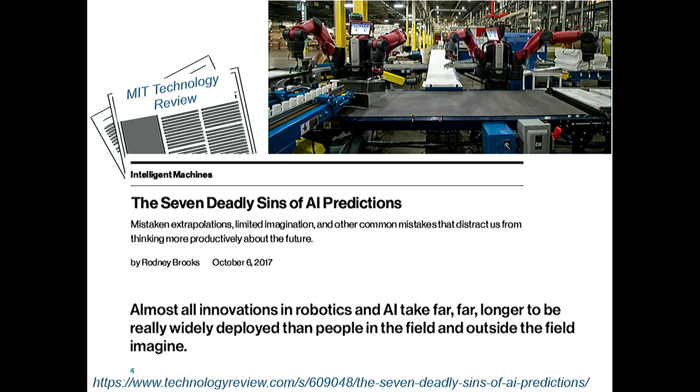The warning I want to give you comes from Rodney Brooks. Admittedly he's Australian, which perhaps we hold against him, but he's good. He's a robotics researcher who spent all his time in the US. He founded Rethink Robotics and created the Baxter robot, which has been used for a lot of modernisation. It's not a fancy robot, it's relatively inexpensive, and does a lot of stuff in factories, as you can see in the video.

He warned us that all these predictions about innovations in AI and robotics will take a lot longer than you think. So if you follow that kind of thinking, you'll know what he's talking about. But just to warn people, it's not going to happen immediately.

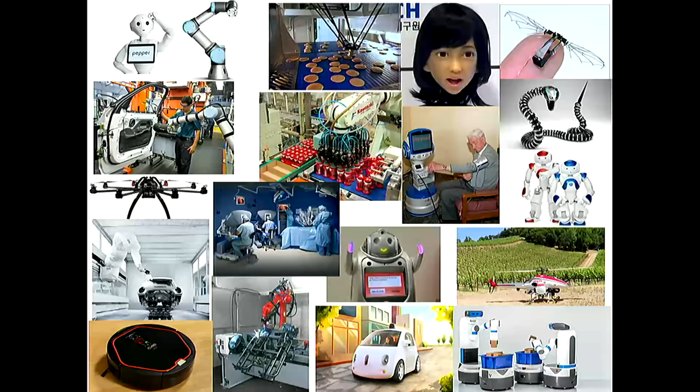But I do have to talk to you about what is a robot. Everybody kind of asks this question. There are some examples of robots up there, and it's difficult to define precisely what a robot is. I wouldn't recommend you split hairs on it unless you've had a few beers and want a good late-night conversation at a party. Because, is a crane that's putting up a building a robot? Well, normally we'd think not, right? Why is that? Well, actually, we think robots have to be doing a bit more than that.

But there are all kinds of robots. You can see welding robots, paint spraying robots, palletizing robots. Those industrial robots are characterized by having lots of joints, arms, sometimes 7 joints, multi-axis, and they're programmable, so they're multitasking—you can program them to do different things. That's one kind of robot. They've been around in industry since about 1960.

Then the other kind of robot are service robots, which are generally mobile. There are robot vacuum cleaners, autonomous self-driving cars, logistics robots in Amazon's warehouses, helicopters and drones that are autonomous. They're all robots because they're programmable, multitasking, can do lots of things, and because they're autonomous—they're making their own decisions. Well, we program them to do that, but they're making their own decisions.

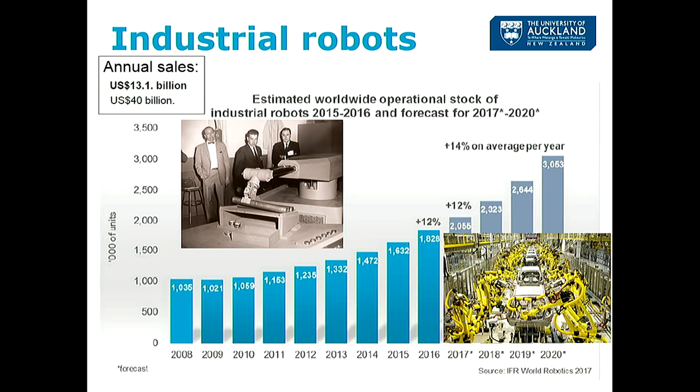Nowadays there are about 2 million industrial robots installed in the world—that's a rough estimate. The International Federation of Robotics does a report every year summarising this stuff, and the number of robots is growing about 14% a year. So the number is increasing around the world, but not crazily—it's been gradual since about that time, maybe a bit faster now than it used to be.

That's about 300,000 more robots a year in factories. The highest uses are in automotive, making cars, and in electronics, assembling components. Annual sales are about 13 billion in robots, and if you include all the software and parts that go with them, it's about a $40 billion business around the world. So it's big, but not massive.

If you look at the service robot industry, we usually think about two kinds: professional service robots and personal or domestic ones. They're quite different businesses really—the technology isn't so different, but the business is.

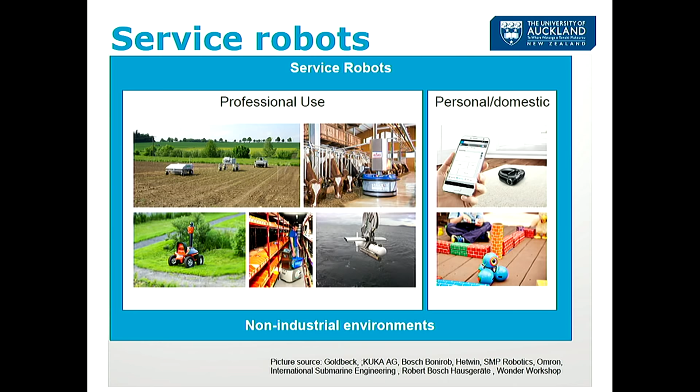Professional ones are used on farms—this shows a robot in a milking environment, and there are different kinds of milking robots. There are quite a few in New Zealand; not a large percentage of farms have them, but there are quite a few. There are also drones, robots cutting your lawn, and logistics robots moving things around factories. Then there are personal robots—the robot vacuum cleaner, the Roomba, and a dozen or twenty other kinds of robot vacuum cleaners around the world, plus entertainment robots, kids' toys, and all that kind of stuff.

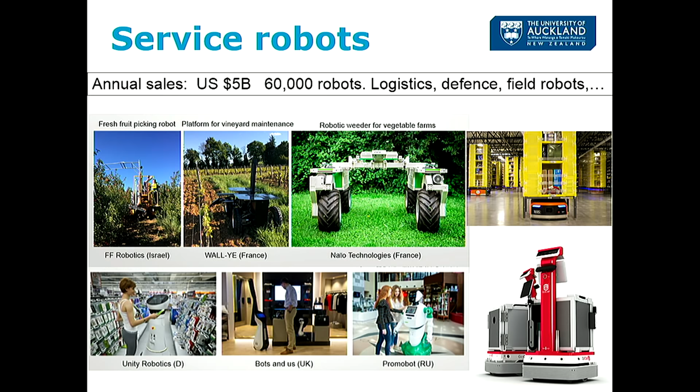For professional service robots, that's about a $5 billion business, about 60,000 robots a year—logistics, defence, field robots on farms, and so on. The largest use is in logistics, think Amazon's warehouse where robots pick stuff up and put it in the post to send to you when you order things. For personal service robots, there's a lot more—maybe 7 million sold a year, worth about $2.6 billion, much of it household vacuum cleaners, with millions sold each year.

So that's the rough picture of what's going on in the world. In terms of research topics, I've taken a bunch of topics from the biggest robot conference in the world, which is in Brisbane in two weeks. These are the kinds of things people study when doing research in robotics.

The thing to remember is that robotics research is a systems kind of research. A lot of research involves working on one component, one piece, one material, or one gadget—people doing robotics generally don't do that. A few do, but generally you're trying to build a robot system. It's hard to get your paper published unless you build the robot and do something with it and get results, because you're making a claim that your theory will enable a robot to do something. So it's a different kind of research. Other areas are similar, I guess, but most areas are more narrowly focused.

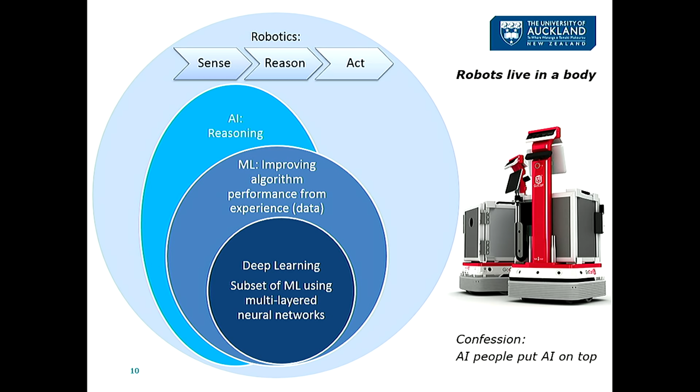So people will debate this, and AI people will come along and give you this circle diagram with AI at the top and robotics underneath it. You could argue about that for a while, but this is the way I see it: robotics is sense, reason, and act. AI is about the reasoning, and people talk very strangely about AI these days, especially in the media, as to what it is.

But for me, it's about making decisions, about reasoning and trying to be autonomous. Some people see it as seeking to emulate human intelligence. You might have seen - last night the AI Forum released their report on AI shaping the future of New Zealand, with a literature survey and a whole lot of details about what it might mean for New Zealand.

And then machine learning is part of that - learning from experience is a way to be able to make better decisions. A lot of the new advances are in the subset of machine learning which is deep learning, where you use neural nets to make decisions. Recent advances in three things - the algorithms for multi-layered neural networks, the speed of the computer hardware to execute that, and the massive amount of data available - have enabled a whole lot of things to tip over and happen usefully in business.

So you'll see - I'll show you a video later where we're using deep learning to find kiwi fruit, because it's better than handcrafting the algorithms.

So talking about research in New Zealand, I'm going to give you a kind of sampling of that, and I want to thank my colleagues from around the country who have given me a slide or two each so I can tell you what's going on, because that's what I was asked to do, and that's something we do want to do.

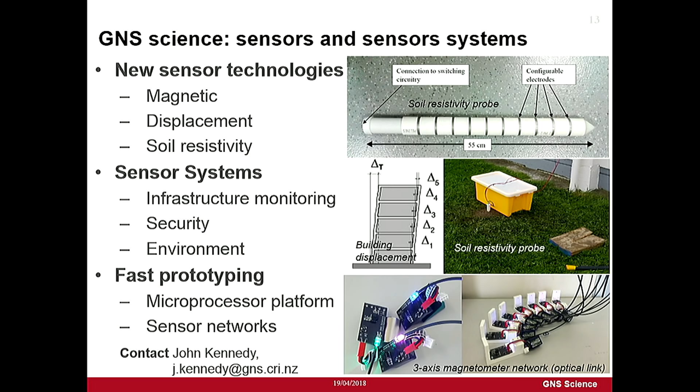And GNS—John Kennedy gave me this slide—are making new kinds of sensors, with quite a lot of expertise in magnetics and so on. So that's good.

And then also making sensors, but putting them on mobile devices and more outdoors, are the people at Lincoln Agritech, a small research organisation attached to Lincoln University. They do a lot of work on farms: crop assessment, spraying, estimating yield—all really important for the business. They use not just vision but also infrared, radar and electromagnetic sensing. They've got a lot of expertise in electromagnetics, and they're putting it on devices and vehicles, driving around farms trying to measure, model and predict the yield from grapevines.

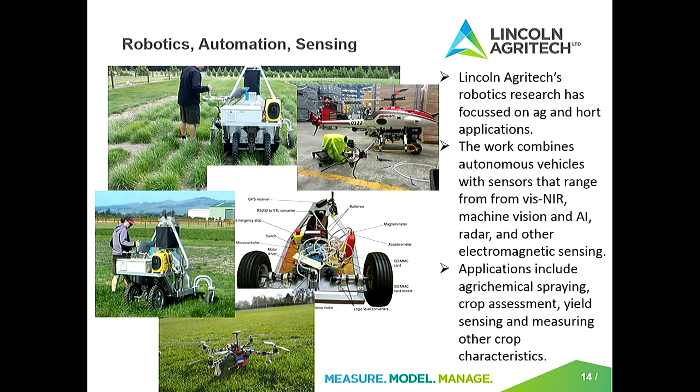At Canterbury nearby, there's a number of groups working on robotics, ranging from assistive devices to help people who need help with physical movement, to manipulating at the cellular level - robots manipulating individual cells. There's a big mission there, which is laboratory automation. The DNA sequencing only succeeded before we expected to sequence the human genome because of robotics, automating the process in the laboratory.

So that's quite a good mission, and there's more research about that. It'd be nice to send a robot through your body and clear out all the cold or flu bugs, but we haven't quite got to that yet.

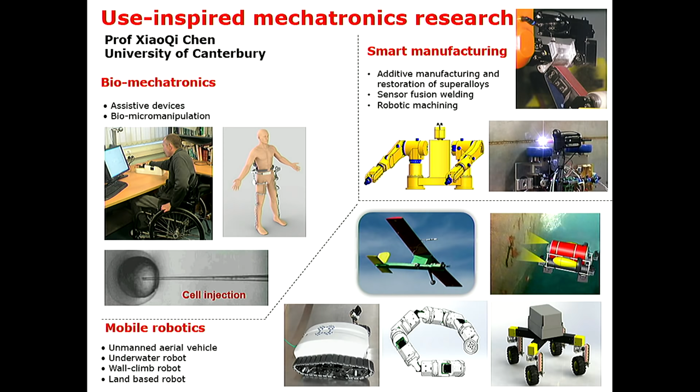And then robots in manufacturing, including robot machining, and there's a lot of work on mobile robots there, underwater robots, but also robots that are flying around in the skies. There's a geospatial unit doing mapping. And there's wall climbing robots as well.

And of course, well, Mike Shadford's going to talk about industry next time, so I won't talk about companies so much. And then at Canterbury, but with Scion, who's based in Rotorua, Richard Parker's doing this at Canterbury with some of the people there, making a tree climbing robot that climbs from tree to tree.

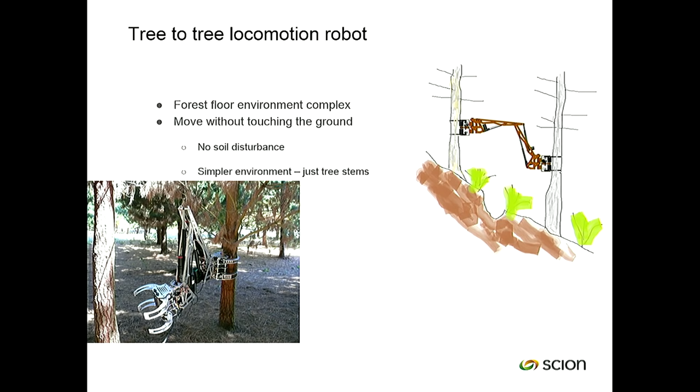You can kind of see what it's doing. And then he tells me he put a chainsaw on it and cut some branches off a tree to do some pruning. Sounds dangerous to me, but forestry is dangerous anyway, I guess. So that's a very specialised kind of robotics work, but he thinks it's better than trying to traverse the ground is to climb from tree to tree.

And Richard Green's doing quite a lot of work, and he's in computer science, doing a lot of work in computer vision, especially 3D reconstruction. So there was a project about grapevine pruning - reconstructing the grapevine structure by looking at it with cameras and then figuring out where to prune it using pruning rules. It's quite interesting. And then he's been doing some stuff about pruning trees as well, and drones.

And also some work with underwater ship hull inspection. We're working together about that, and other inspection tasks.

And then at Waikato, moving up to North Island a bit, Mike Duke's a professor of agricultural robotics there, and his team's worked on a number of agricultural robotics projects and working together with companies, for example Arborgen. So they're working on robotics to do things like helping in forestry nurseries - pulling plants out or putting them in, manipulating the plants and so on, to automate that process, all about being more productive.

And we're working together on Mike's group and ours on kiwi fruit and apples, and I'll show a video of that. Mike's also doing some things about harvesting asparagus, which is, from an automation point of view, other people have tried to do it and it's quite hard. And he's doing quite a few other projects as well.

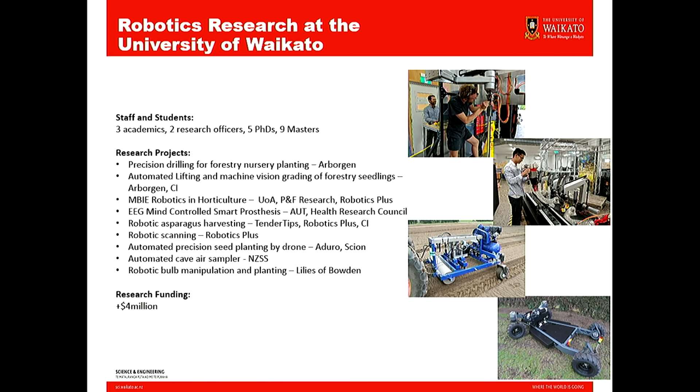I quite like that Mike builds stuff. He used to build electric cars and things, so he's always building things, which is what we're doing in the project we're working on together.

And then at Otago, there's quite a lot of focus on some of the technology for robotics. Brendan McCane gave me this slide. The people he's working with down there are kind of focusing on understanding - you can see in the video - understanding movement and what's the motivation for why you would want to move. So how you learn about the world. It's a bit of learning, how to predict what's going to happen in the future. If something's happening now and you make a movement, what will happen next?

And again, there's a lot of focus there on reconstructing 3D shapes from images. So take an image with a camera, which is a flat image, and figure out what's the 3D nature of the world you're looking at, which is something that robots need to do.

And at AUT, there's a robotics group, Albert Yeap's group, working on spatial cognition using robots. This is about enabling robots to navigate from A to B more like humans do. Normally robots navigate geometrically - measure things and calculate and figure out waypoints and do it all mathematically - but humans don't do that. So Albert's trying to translate that from what humans do into drones.

If you went to the lecture series last year, Nik Kasabov spoke about AI. He's not in the same group, but he's working at AUT on some of the decision making for robotics.

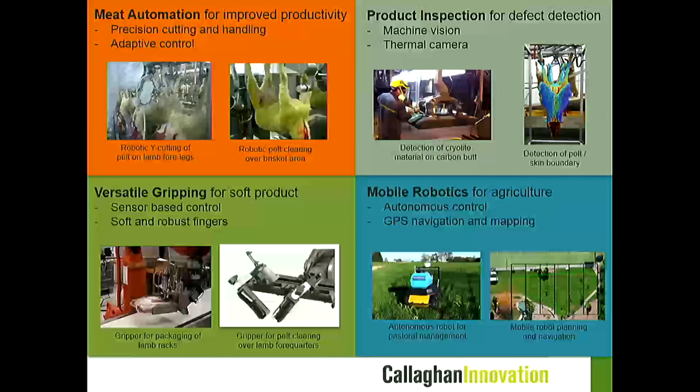This shows the Y-cut machine, which makes a cut in the pelt before it gets pulled off the front of the sheep, and product inspection for defects. They've also done work on soft grippers, manipulating soft objects. A lot of New Zealand things being manipulated are soft, variable shapes, because they're fruit, meat, fish, and primary produce - we have such a focus on it.

They also have some work on outdoor robots and mapping as well.

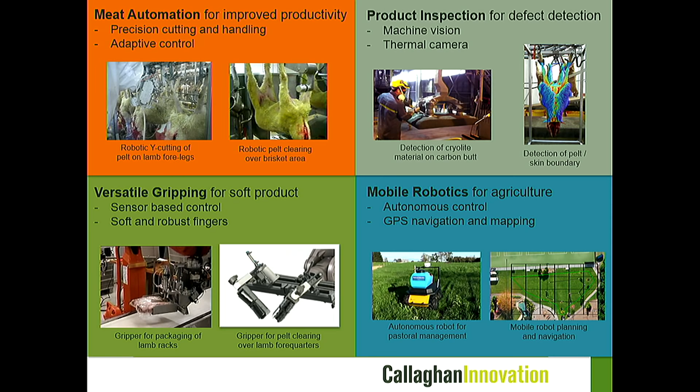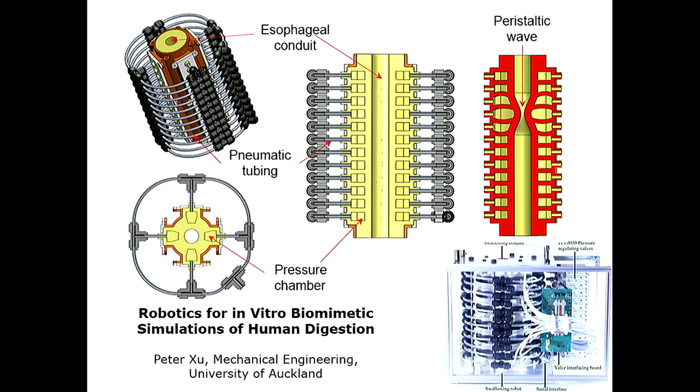At Auckland University here, Peter Xu is building a robot human digestive system. This is research to understand how digestive systems work. There are some applications that spin out of this kind of stuff - that's what he's trying to do, which is interesting.

At Auckland Bioengineering Institute, there's some robotics work there - micro robots manipulating small parts like human tissue and so on. There's some making of exoskeleton devices which you put on your body to help you move, and some specific work there too.

Very high advanced actuators are being built to use in robotics, along with soft actuators and soft sensors, and quite a focus on stereo imaging to be really accurate - minuscule accuracy, sub-pixel image registration accuracy for doing stereo vision, which is really important if you want to manipulate small things and do it really accurately.

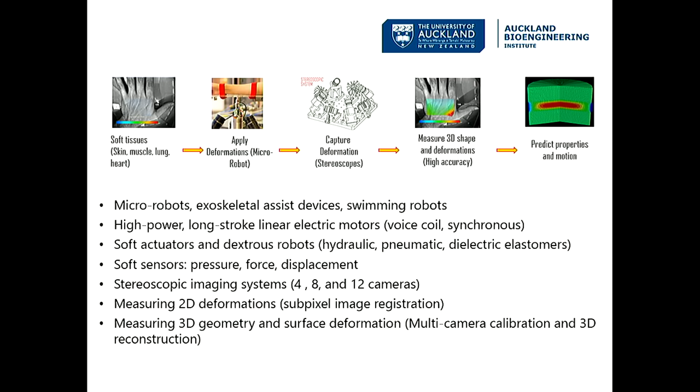Andrew Taberner gave me this slide - he's in mechanical engineering here. He's interested in the health area, and he's got a medical device technologies group.

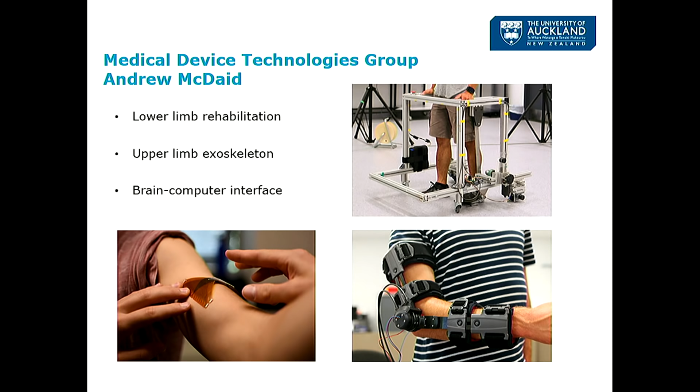He's built devices to help do lower limb rehabilitation. It takes three physiotherapists to do lower limb rehabilitation a lot of the time, which is quite expensive, because they're holding different parts of the body. So he's trying to do this with robotics.

This involves robots connected to your body, and upper limb exoskeletons to help you move and do rehabilitation, or give you strength. They're also looking at brain-computer interface work so you can connect and control prosthetic devices, if you have a prosthetic arm or something similar.

There's a new group at Auckland - Minas Liarokapis' work, which is about gripping. He's an expert in designing and building hands, if you like. They have to be dexterous - dexterity is all about your hands.

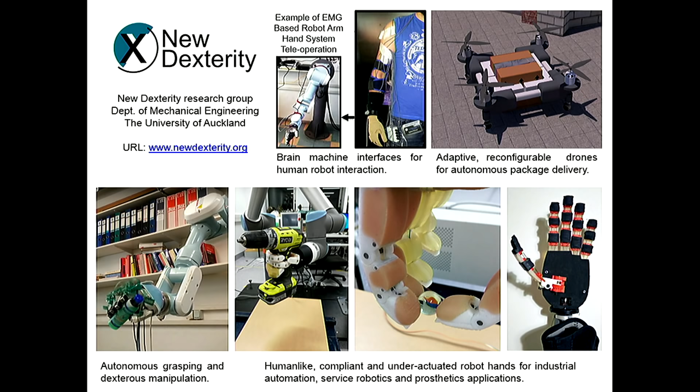You can see some of the hands that he's made. They have to be compliant, soft, able to manipulate things like the little marble the hand is holding there, and pick up heavy things, understand what they're doing, pick up bottles, manipulate them, and so on. This is a lot of research around advanced grasping techniques.

Karl Stol at Auckland is working on drones. His fundamental expertise is in advanced control, so he's using advanced control on drones - in this case, with others in the group, sampling the top of a forest.

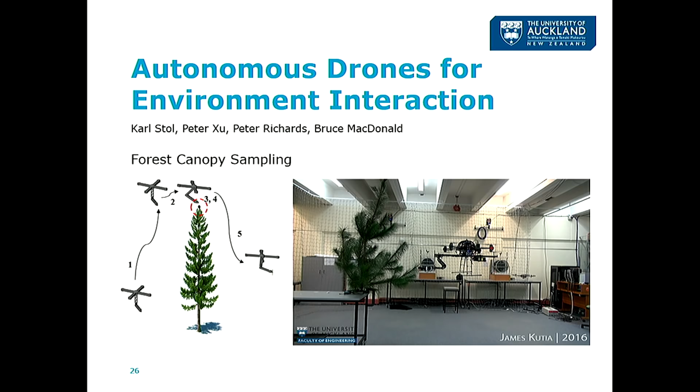When you want to take a sample of a tree, if you're a forestry person, it's got to be from the top of the tree - that's the growing part you want to know about. So you want your drone to fly up to the top of the tree and take a sample.

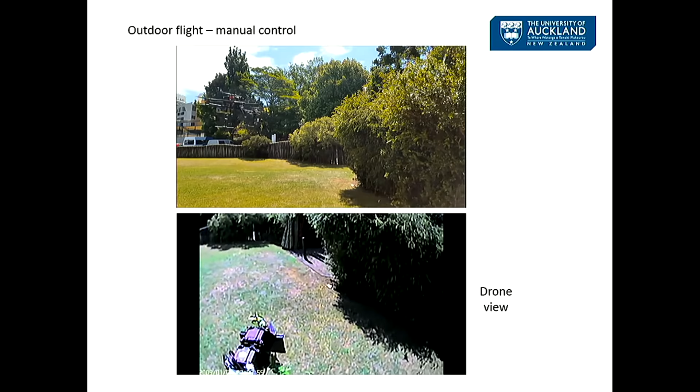This isn't a big forestry tree, but here's a drone chopping a sample out of a tree in the park, just to show that you can do it. Scion, the Forestry Research Institute, is very interested in this kind of work with drones and forests.

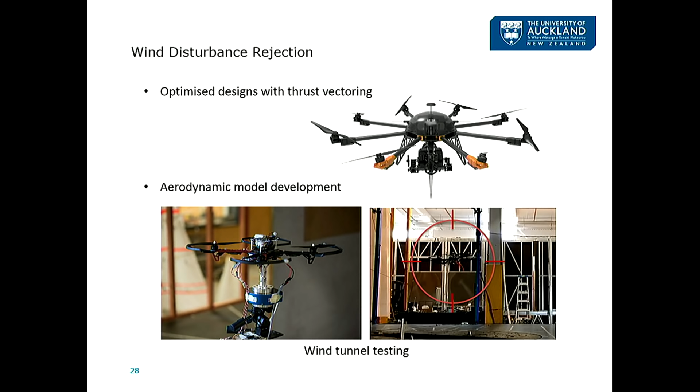The other thing that Karl's working on is wind disturbance rejection. He wants a drone that's in a strong wind, with the wind changing, that can spray a weed or pick something up without being disturbed. That's all about the design, changing the way you point the rotors, and advanced control techniques. It's hard to see it moving because it's not disturbed much, but the one on the bottom right is the drone in the wind tunnel at Newmarket, where he tests his drones.

So that's most of what I'm going to talk about. What I wanted to do now was show you a couple of videos, some examples of this kind of technology.

They're from our group. The first video is from our CARES group. We've spent more than 10 years working with robots to help older people, doing that together with partners in Korea, research partners and a couple of companies, especially one, Yujin Robot. We started with a robot they made for kindergarten children, and they sold a few thousand of those. We put our own software on it and used it to help older people.

It's not a high-tech robot in the sense that it doesn't do fancy manipulation or anything. What we're trying to study is what it will be like to interact with a robot, and how will it change things. Will it help you manage your health? Can we change people's behaviour with robots? Can we get them to do something they wouldn't have otherwise done, something good for them? There's a whole lot of questions we're trying to answer, and Liz Broadbent, who's going to talk about humans and robots later, will tell you more. For me, that's the fundamental question. There's 25 people in the group plus postgrad students, and we work across medical and health sciences, science and engineering, collaborating to design robots to do this kind of stuff.

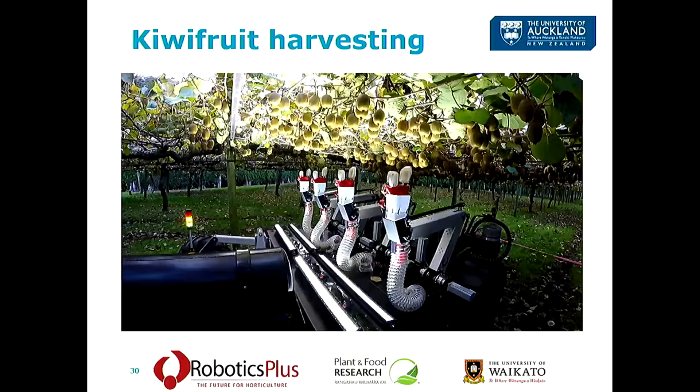Anyway, so this is the harvester. It's got to pick fruit every 2 seconds, otherwise don't bother, it's not economic. You can see this is last year's one, it's dropping a few. That's the problem we've been improving, and this year's version is better.

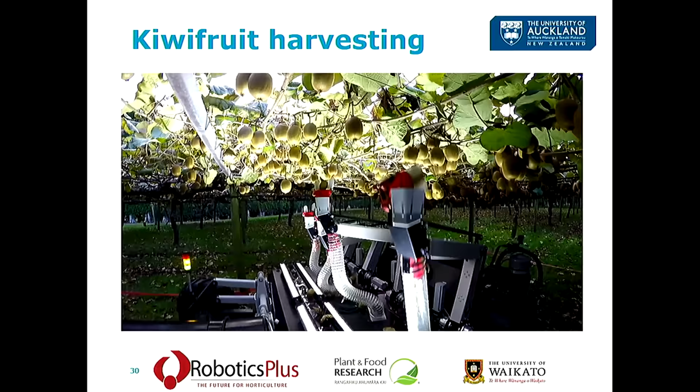All the kiwi fruit are picked at the same time, so we don't have to do ripeness selection. The latest version is a bit better, and it works well enough that this is going to be commercialised for kiwi fruit picking by robot.

So that's most of what I wanted to talk about. I did want to end with one thing, which is: don't fear the robots. They're not coming to take your jobs. There are more people employed in the world by percentage of population than there ever have been, and it's been increasing for hundreds of years.

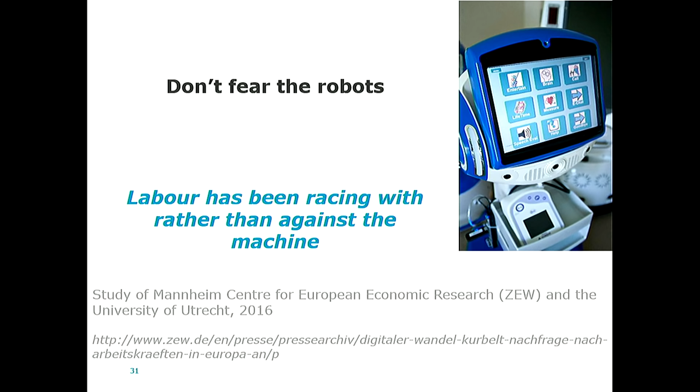And it looks like, and this is from a report from Germany, a study people did, it looks like - and this is a quote from them - labour is racing with the machine, not against the machine. So wherever there's automation, there's more jobs, not fewer jobs.

We could argue about that all day, but I just wanted to suggest that you don't just have a knee-jerk reaction of being kind of worried about it.

If you're not convinced, look up on Google the number of bank tellers employed after ATM machines were introduced, because it went up, not down. Have a think about that. There's a really good video on, I think it's freethink.com, about this if you want to have a look.

So that's what I wanted to tell you about - a bit about robotics and a bit about what research is happening in New Zealand. There's quite a lot going on, but actually it's really small in the world.

There are some massive efforts going on in robotics around the world, in companies as well as research organisations. There's a lot happening in industry in New Zealand too. Mike Shadford's been installing robots with his company for some years, he's going to talk about that in the next session. Then Patrice Delmas is going to talk about robot vision, which is a whole topic on its own, as you'll hear. And Liz is going to talk about what I think is the key topic: humans and robots together, because we just don't know enough about it. What you see in the movies is, remember, fiction, so we don't really know what it's like.

Great, that's it. If you have questions, we have time for questions.